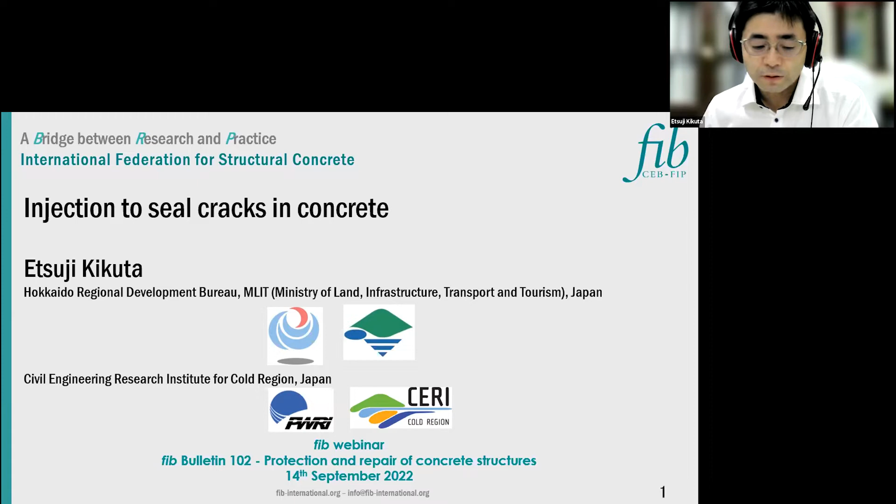Thank you. I am Etsuji Kikuta. I would like to serve as the final presenter of today. My contribution to Bulletin 102 is injection to seal cracks in concrete, but in today's presentation, I would like to call it crack injection for simplicity.

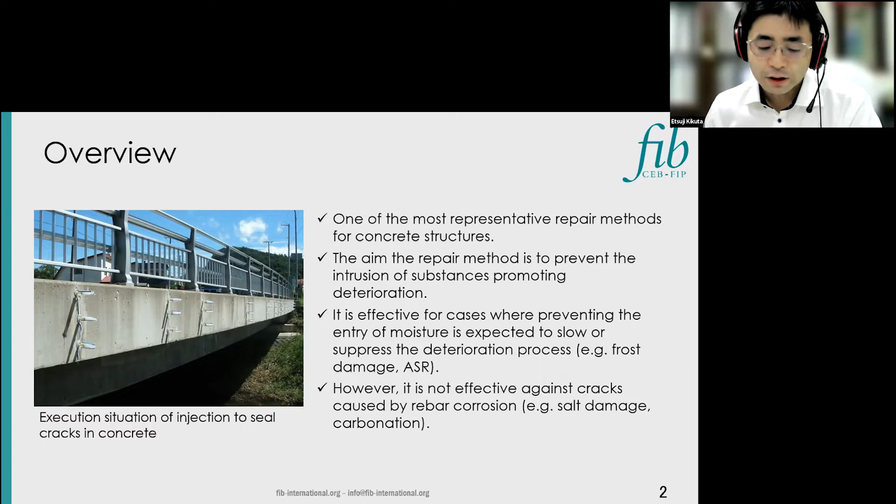Crack injection is one of the most representative repair methods for concrete structures. It is a method that prevents deterioration factors such as water and salt from entering the cracks by filling the cracks with injection materials. It is applicable to both remedial and preventive maintenance. It is effective for cases where preventing moisture intrusion is expected to slow or suppress progress of deterioration, such as frost damage and ASR. However, it is not effective against cracks caused by rebar corrosion, such as salt damage and carbonation.

There are various crack injection materials which have performance corresponding to the condition of cracks to be injected. Also, there are several types of injection methods and injection tools. Therefore, it's important to accurately judge the condition of cracks and the execution environment, and to appropriately select materials and methods. Without appropriate selection, early redeterioration may occur.

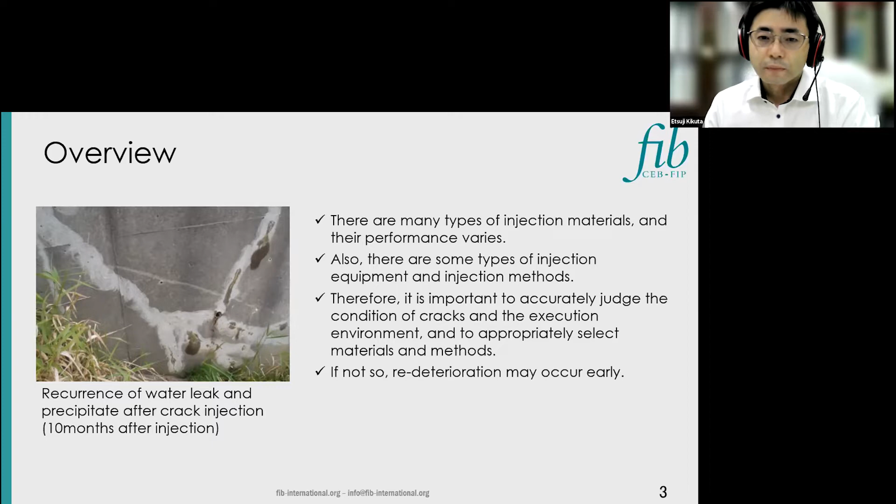In advance, I would like to introduce the materials that were mainly cited in the contribution to the bulletin. This is a guideline for concrete structural repairs published by Public Works Research Institute in 2016. Although it is only published in Japanese, it is expected to be utilized by all engineers involved in concrete repair, and it is available for free download, and it is already being utilized by many engineers.

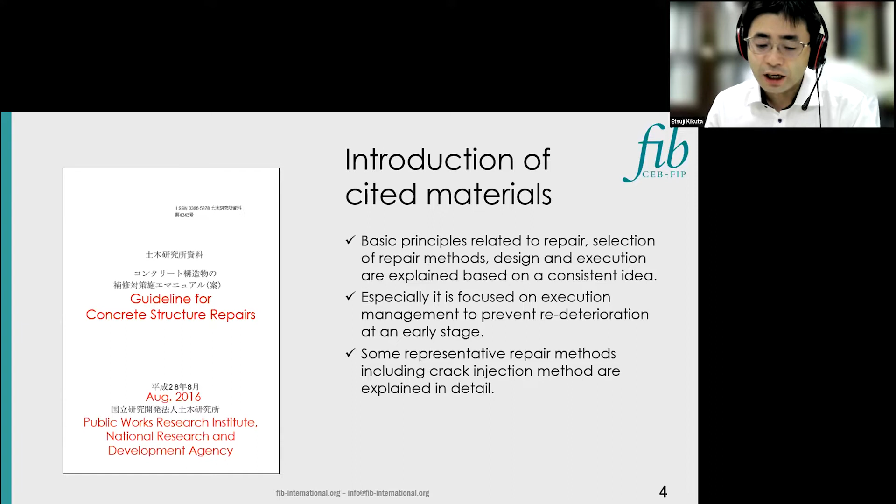This is contents overview. Today, I will explain basics, design, and case study from among these. A case study also includes examples of design, execution, and so on.

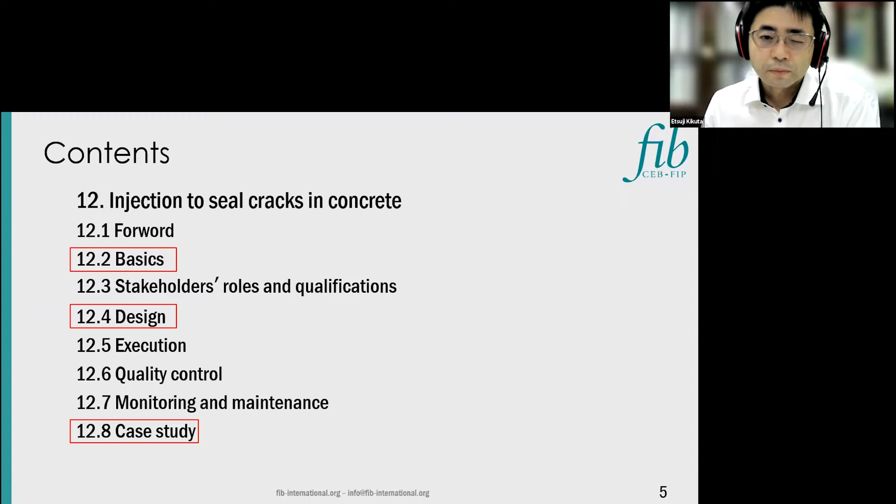This is content of basics. There are several types of both injection methods and injection materials, and appropriate selection must be made according to the state of cracks and the execution environment. Therefore, the characteristics of each materials and methods are important information.

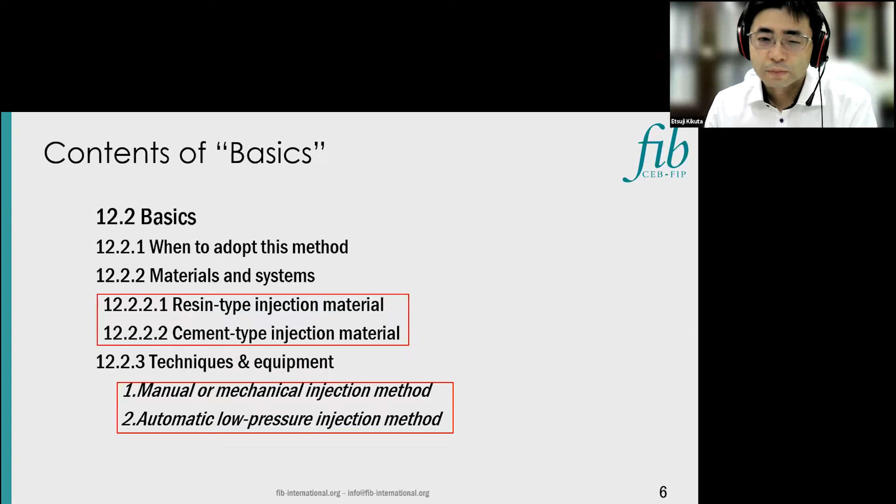About crack injection materials. Crack injection materials are broadly classified into resin type and cement type. In the resin type, there are products with various viscosities, and the applicable crack width depends on the viscosity. And since the viscosity of injection materials tends to be affected by temperature, ambient temperatures and concrete temperatures are important management items. Curing time is also affected by temperature.

The cement type is the same materials as the structure to be repaired, and the crack inside is excellent in terms of density and solidity. But since the tensile strength is low and there is no followability, it cannot be applied to cracks with opening and closing behavior. In addition, since the viscosity is low, if the crack width is large, it tends to flow down and cause poor filling.

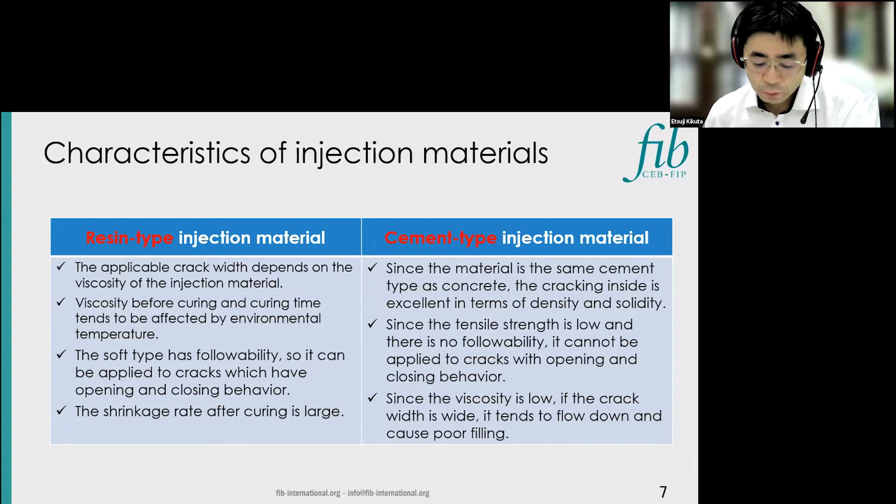There are two types of crack injection methods. One is the manual or mechanical injection method, injecting at high pressure in a short time. The other is the automatic low pressure injection method, injecting over time with low pressure and low speed. The manual or mechanical injection method is a simple injection method that does not require special tools. On the other hand, skilled workers are required for execution.

The automatic low-pressure injection method enables reliable and stable injection, so execution management is easy. A special tool is required, but after filling the tool with injection materials, no manpower is required. Because of the low pressure, there is little leakage from the shield and no skilled worker is required. But the working days tends to be longer, including the preparatory work.

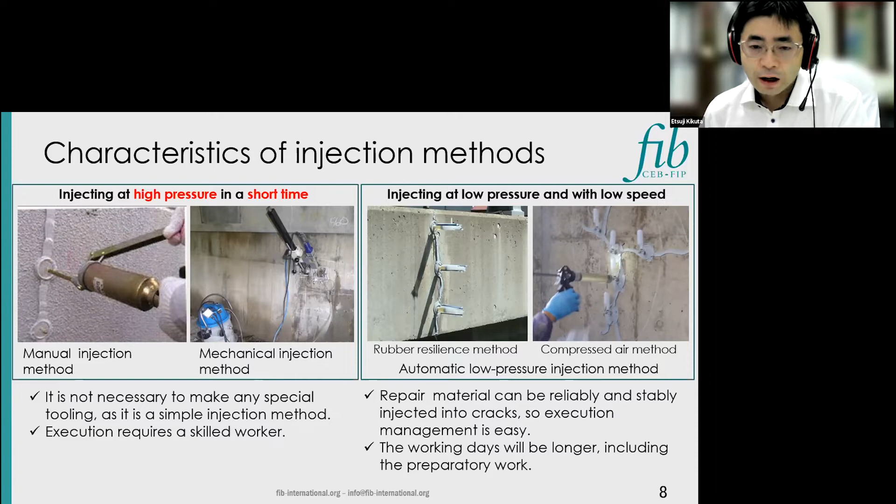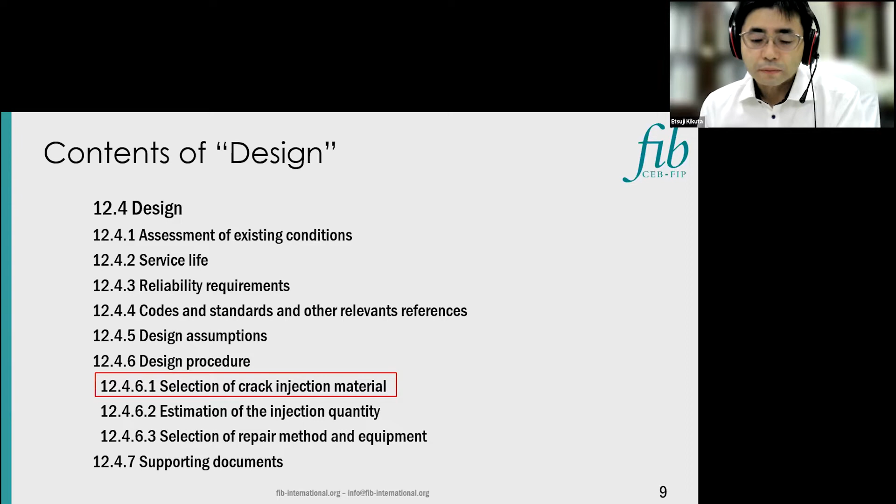About design, here I will cover selection of injection materials. At first, about resin type materials, there are a rigid type and a soft type in the resin type materials, and each type has materials with various viscosities. A material with an appropriate viscosity must be selected according to the crack width, environmental temperature, and other execution environments.

Generally, the rigid type is less expensive, but the rigid type does not have flexibility, so it is not applicable when the cracks have opening and closing behavior. The soft type is applicable to such cracks.

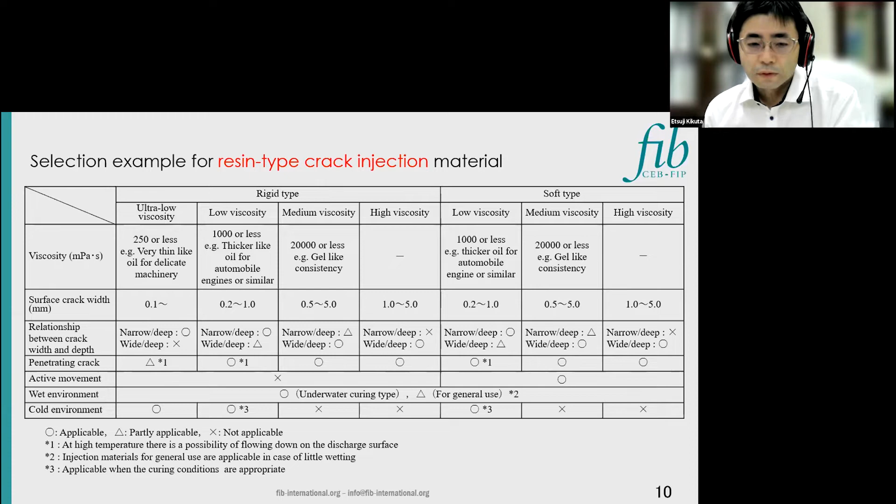Next, about cement type materials. Cement type include products with and without emulsion polymers, but products containing polymers which have higher adhesion are common. For application in cold climates, products containing polymers are more resistant to frost damage. It can be applied even in wet conditions, but since materials will not cure in cracks with a large amount of water supply, it is necessary to apply materials that can be cured quickly.

And cement type generally have no flexibility, so they are not suitable for cracks with opening and closing behavior.

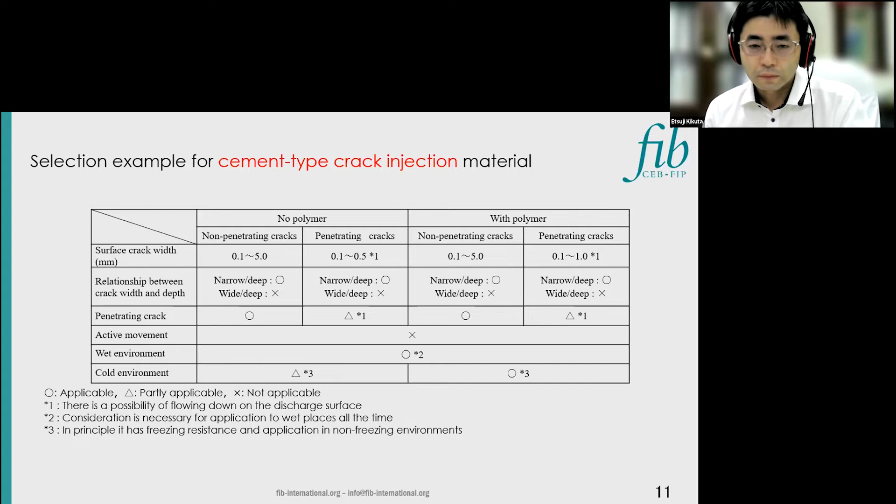So here goes into the case study description. The target structure was a bridge abutment on a national highway that had been built on the plains in the cold, snowy region 24 years ago.

At the time of construction, cracks had occurred due to temperature stress, but the surface crack width was less than 0.2 millimeters, so this structure was not repaired immediately and it was kept under observation.

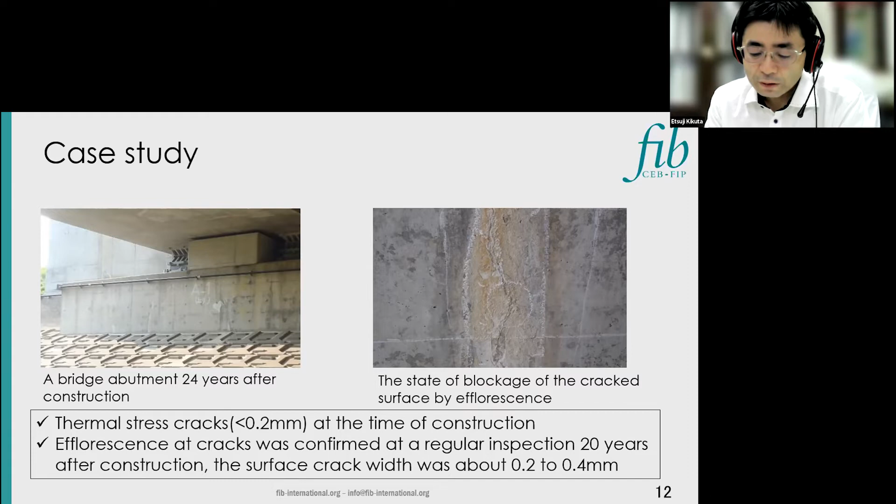Then, efflorescence deposition from the cracks was confirmed in the inspection 20 years after construction, and the surface crack width had expanded slightly to about 0.2 to 0.4 millimeters. Therefore, a detailed investigation was carried out and repair interventions were considered.

Detailed investigation was conducted for 2 years in order to confirm the progress of cracks. Photos show investigation of the state of blockage on the crack surface.

The photo below shows a general investigation method by core sampling. The photo above shows a method called cross-cutting, in which a cut is made at right angle to the crack using an electric tool.

By the way, using this cross-cutting method makes it possible to create injection ports and inject materials even into cracks that have surface blockage.

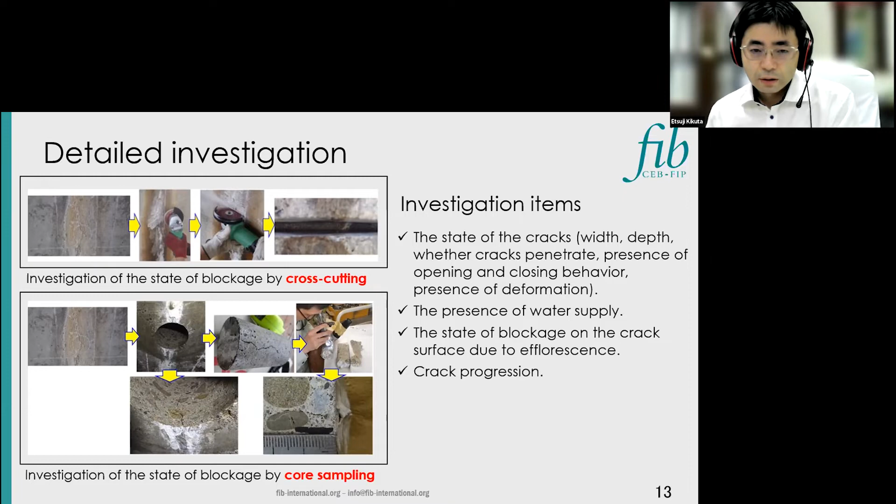Detailed investigation revealed that the cracks had penetrated and that reinforcing bars had not yet corroded, and so on. Also, it was presumed that the cracks had progressed due to the influence of moisture supplied to the inside of the crack.

Based on these factors, it was judged that interventions were necessary to prevent corrosion of the reinforcing bars.

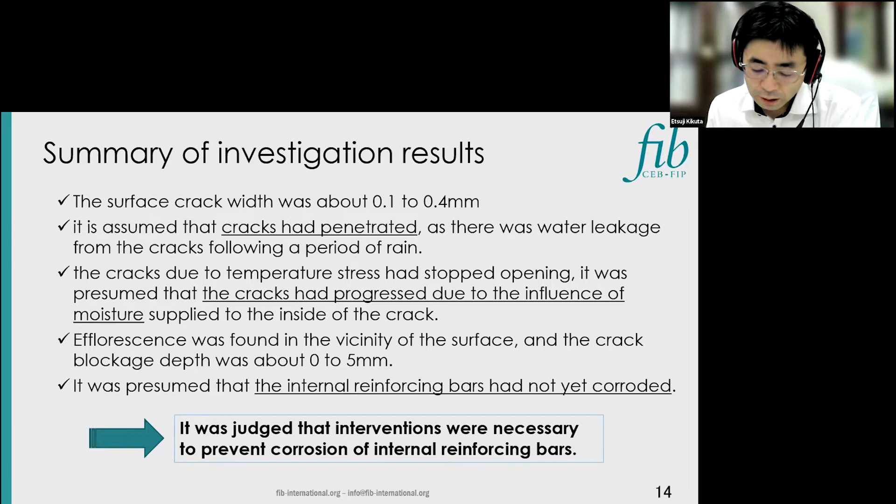About design of intervention method. Repair policy was set to suppressing the invasion of deterioration factors and protecting reinforcing bars. There were also repair methods other than crack injection that was suitable for these repair policies.

However, since the target crack was penetrating and water entered from the backside, it was necessary to completely fill not only the crack surface, but also the inside of the crack all the way to the backside. Therefore, the crack injection method was the most suitable.

Also, both the crack width and environmental temperature were within the applicable range of the crack injection, and the surface blockage could be handled by cross-cutting method. Based on these, it was decided to apply the crack injection method.

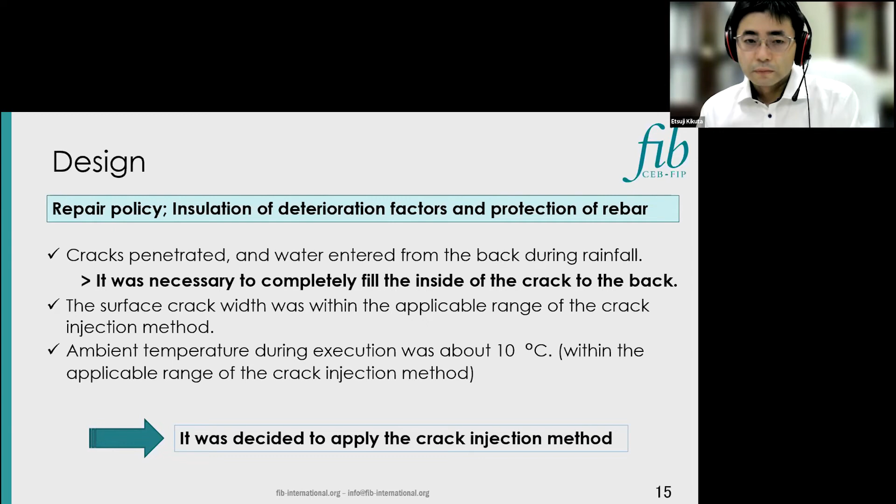About selection of injection materials and injection method. Due to the penetrating cracks, cement type could flow out the back and result in incomplete filling. So, resin type injection materials was suitable.

The crack width was often around 0.2 millimeters. It's relatively narrow, so low viscosity injection materials was suitable.

There was no crack opening and crack closing behavior, so followability is not required. Therefore, inexpensive rigid type was suitable. As an injection material that satisfied these conditions, rigid type, low viscosity, epoxy resin injection material was selected.

As for the injection method, since the cracks were linear, it was judged that injection was possible even at low pressure. So, the automatic low pressure injection method was selected.

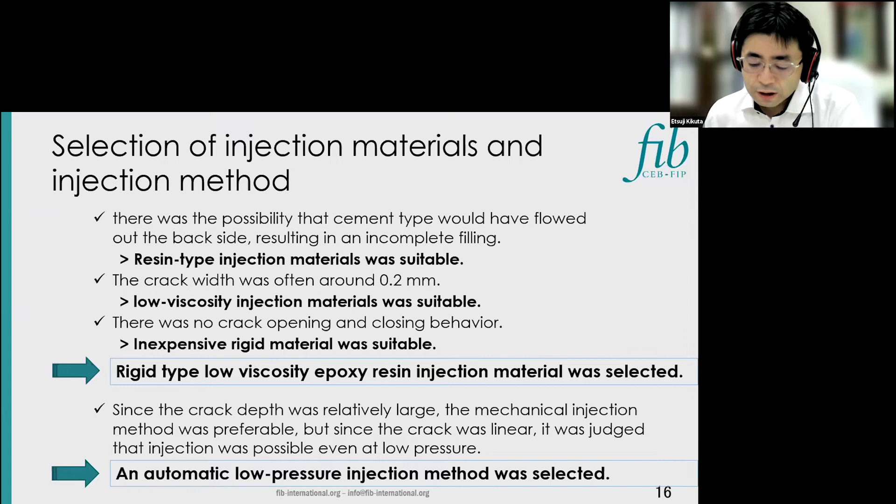The photo shows the actual injection situation. Here, air pressure injection type devices were used.

Since water leakage occurred from cracks during rainfall, it was carried out in fine weather. Injection ports were created at intervals of about 200 to 300 millimeters, and investigation ports by cross-cutting and core sampling were also reused as injection ports.

In order to ensure the quality, the following items were managed. Management of temperature and curing time is especially important.

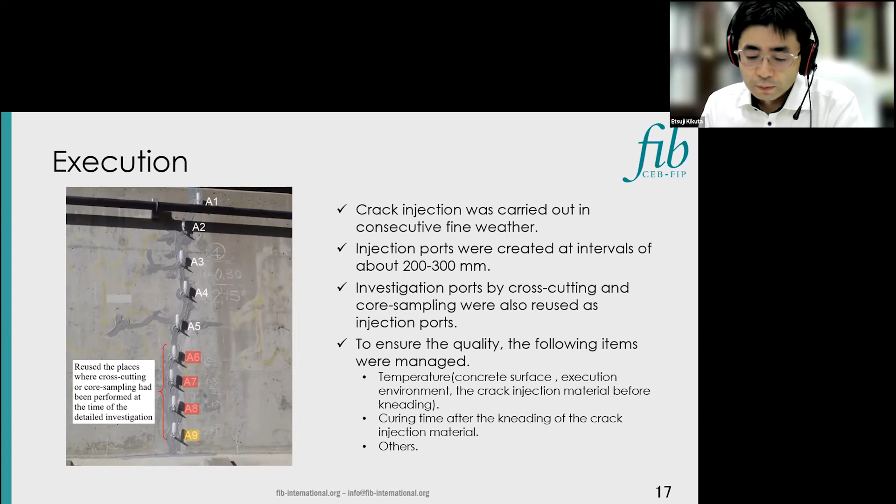About the inspection after execution. Since the cross-cutting method had little execution record at that time, small diameter cores were taken after injection curing, and the filling state of the injection materials was confirmed.

As shown in the photograph, injection materials had completely filled the cracks as far as the eye can see. Then, 1 year after execution of repair, the inspection of repair site was carried out because if early redeterioration occurs, there are many cases that occur within 1 year.

It was carried out during rainfall in order to confirm whether there was water leakage. Even during rainfall, there was no leakage of water from the cracked portion and no occurrence of precipitate. From this result, it was confirmed that the suppression of water intrusion was sustained.

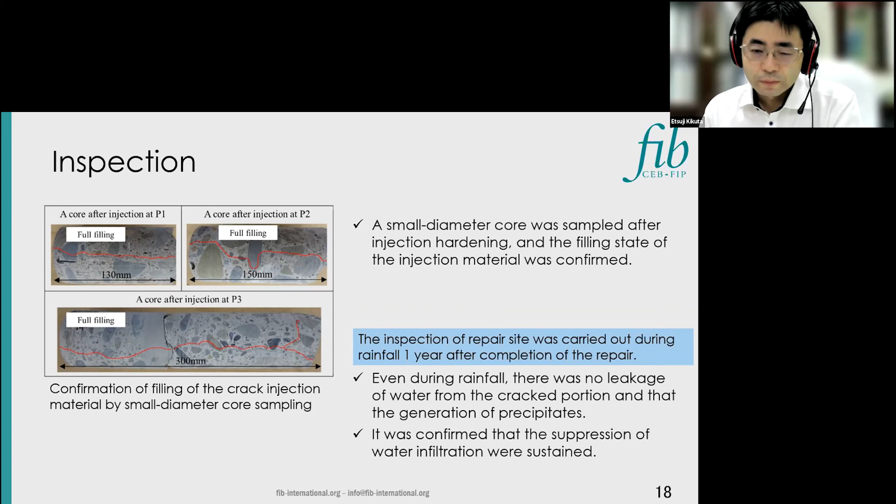Thank you, Etsuji. Etsuji was afraid his English was not clear, but I must say it was quite clear, your presentation. Thank you very much. I don't know if there are any questions. There are none in the Q&A window, but as previously, you may raise your hand and I will turn on your mic and you can raise the questions directly to Etsuji.

Okay, is it Tiago Vieira? Well, he's just saying that it was an interesting presentation and is thanking Etsuji. Gassin Ahem has a question.

The question is, how can we decide which method to use? Etsuji, can you try answering this question? Yes, I can.

How to decide which method to use, low pressure or high pressure. In this case, because the crack is linear, at low pressure... since the cracks were linear, it was judged that injection was possible even at low pressure. Low pressure method execution management is easy, so in this case it was decided to use the low pressure type method.